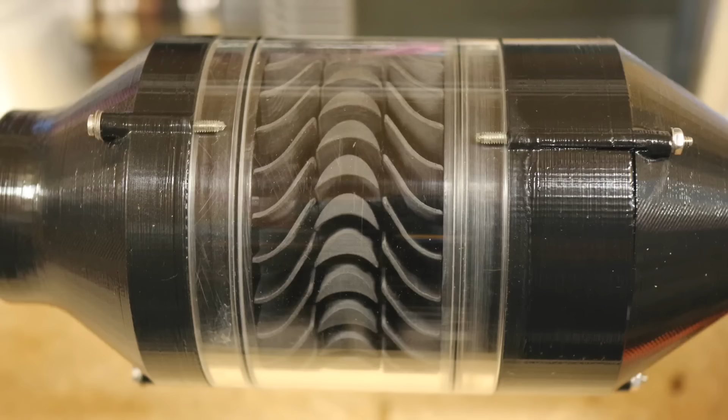For the increasing power of my thermoacoustic engine, I need an efficient way to convert mechanical to electrical energy. I tried a turbine, oscillating stepper motors, a common slider crank drive, and a simple linear generator. So far, nothing has really been satisfactory.

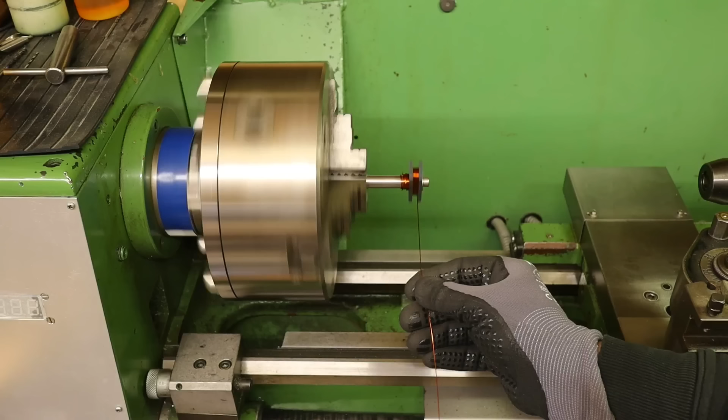For this reason, I would like to design and build a powerful linear generator using the finite element method and the FEMM program. For this, I need strong magnets, powerful coils, a reinforcing iron core, and a stable but smooth running linear bearing.

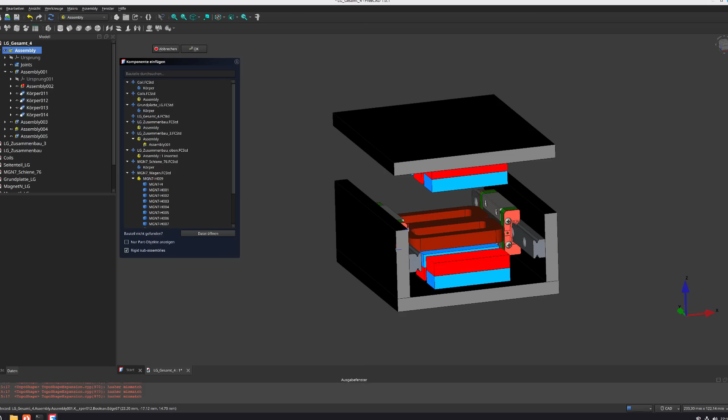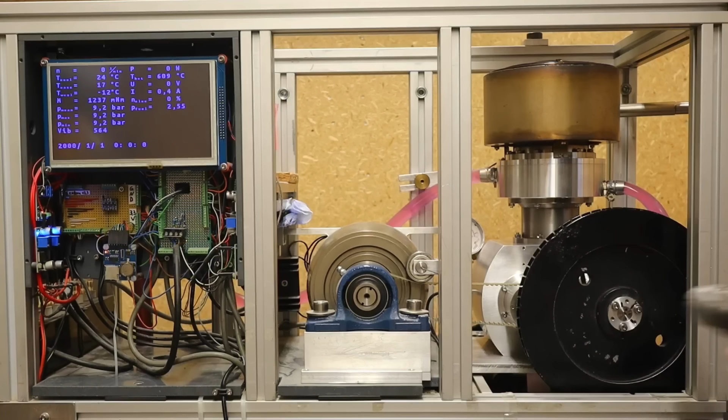With this design, I hope to efficiently convert the energy and support our solar plant with inexpensive, self-generated power during periods of low sunshine. For years, I have been producing my own energy using self-generated biogas and my self-built Stirling engines. Converting the mechanical energy produced by my engines with kinematic gears using a conventional generator is no problem.

My mechanical Stirlings are also very powerful and a lot of fun, but unfortunately they are too expensive and maintenance intensive to be used to produce our own energy economically in the long term.

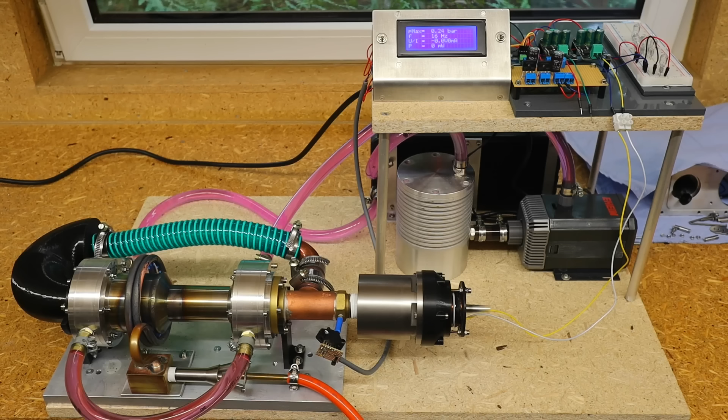For this reason, I consistently try to avoid all meshing elements that cause friction, wear and high costs. My current approach with a very elegant thermoacoustic engine theoretically does not require any moving parts. Unfortunately, it is impossible to extract electrical energy from the motor without moving parts. That is why this conversion is so important for the engine.

My first radial linear generator was very simple in design and low in power, but it worked in principle and was quite elegant in concept.

To increase the engine's frequency and avoid balancing for the moment, I have made various lightweight plastic pistons, and I'm also conducting tests again with piston rings that still come from the kinematic Stirling engines.

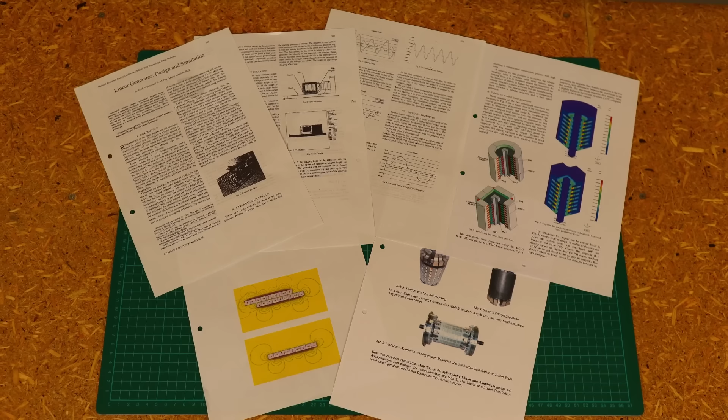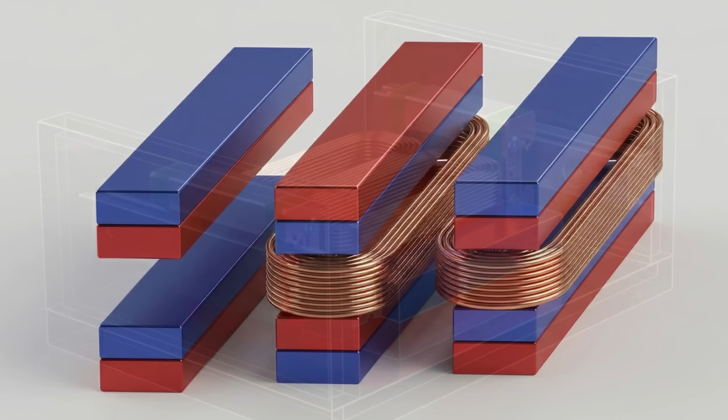I studied the arrangement of energy converting components in various electric motors, linear motors and large commercial linear generators, and learned the basics of induction and the path of the magnetic field lines. The concept is very similar for all these machines, and I've used it to define an initial basic structure for myself.

FEMM is a free program for solving electromagnetic problems using the finite element method. I simulated the various magnet, iron core and coil arrangements and discussed them with you on YouTube and Discord.

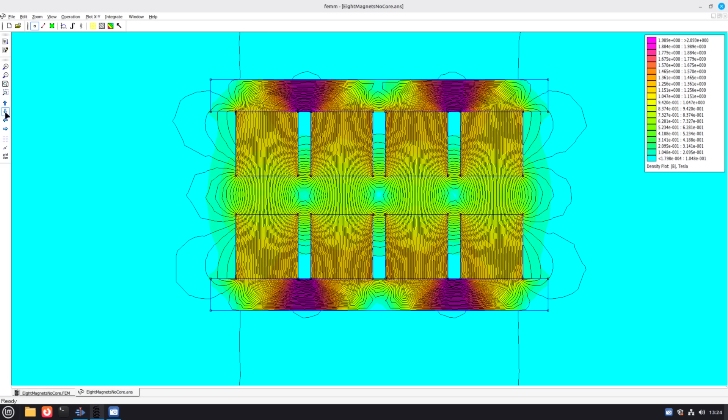After finding the optimum design using FEMM simulation, I moved on to the design stage using FreeCAD, where I had to take into account the available materials and inexpensive components.

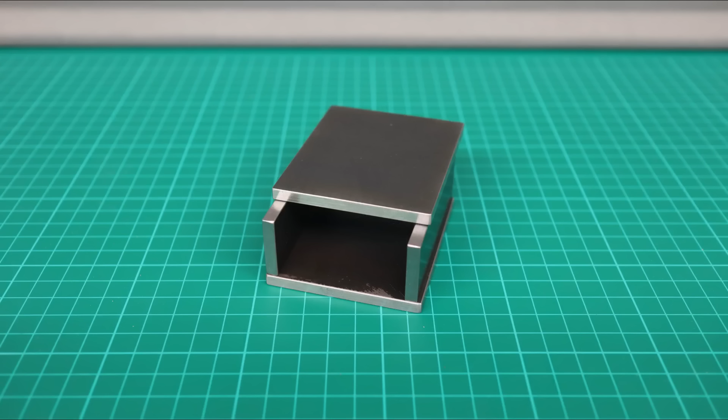For the iron core, I have 5mm thick pure iron sheet metal in my scrap box that can just about withstand the required magnetic field strength without reaching saturation.

The coils are wound from 0.5mm copper wire. I will experiment extensively with the number of turns and adapt them to the constantly changing engine power. MGN07 linear guides ensure stable, lightweight and low friction mounting.

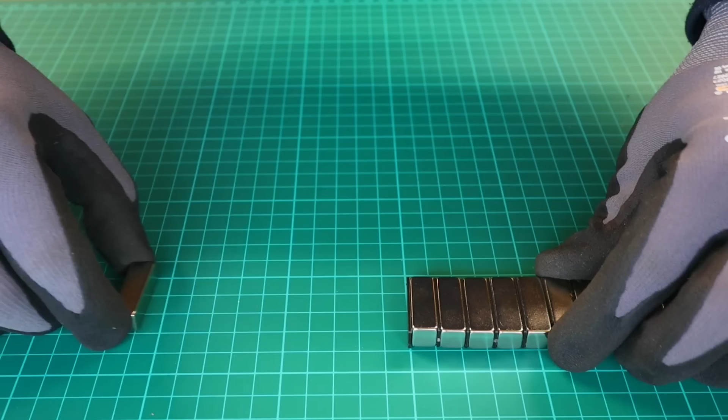The 10x10x30mm N45 neodymium magnets are much stronger than I thought, and I will have great problems attaching them properly to the iron sheets.

I will now continue with the manufacture and assembly of the linear generator and hope to be able to report on the first performance tests soon.